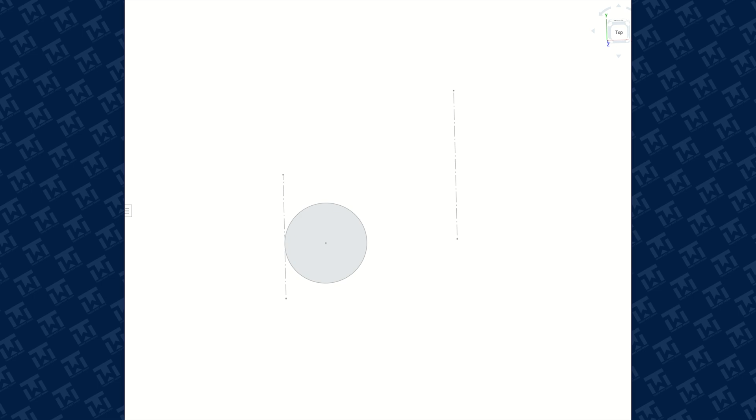That'll get you started. So this project starts with a circle. We revolve it into a donut. Then we add this base to it here, add some fillets, we add this top part. We core it out, add some fillets, and the basic model is done. Simple as that. Now off to the mold.

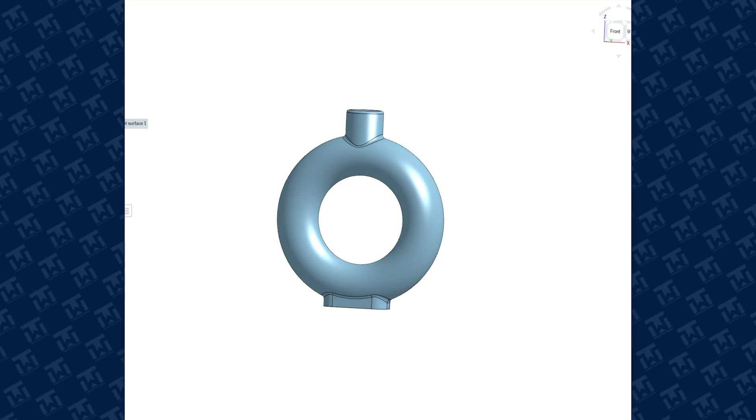So what we're going to do is show you the mold. So that's half of the mold, so make that off that surface. This mold is the same for both sides, so you just have to draw it once. But we have to make this top piece, and that looks like that. So holes line up this way, that makes that core, and we're ready to send this to the printer.

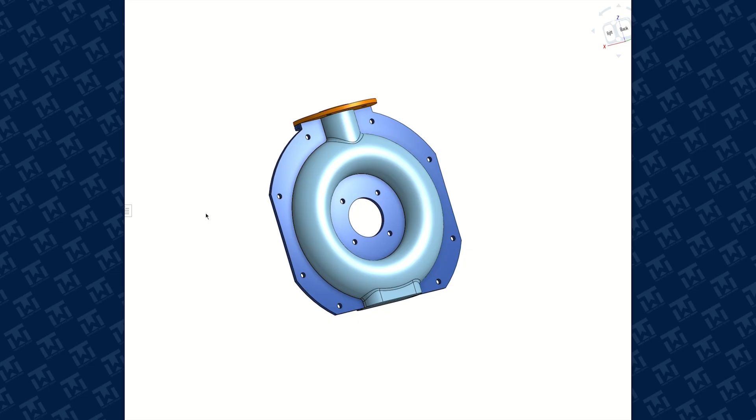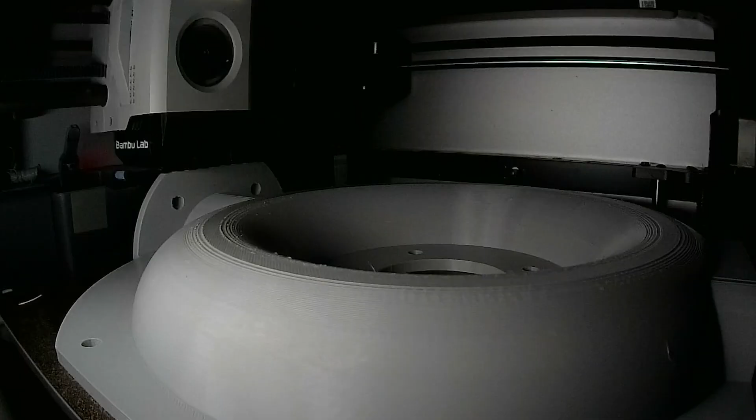It's always fun to watch the printer create my digital creation into something that's real in 3D. So we'll make a few parts, and we'll get this ready to assemble.

The mold's done, it's time for some mold release. So what we're gonna do is take some canola oil, spray it in the mold, take a foam brush, and just make sure everything is nicely covered, and then we'll bolt them together.

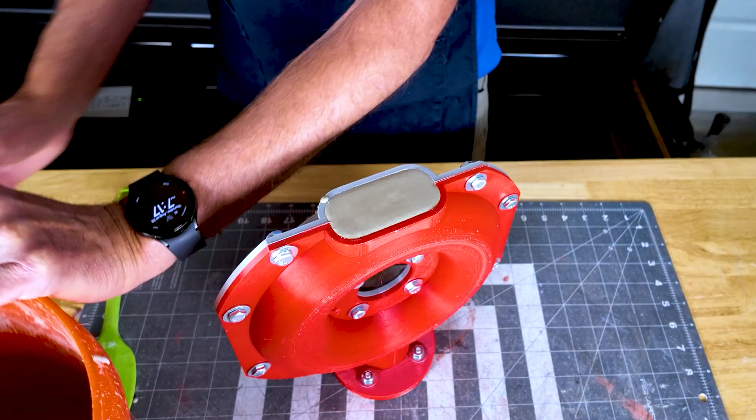All put together, and it's ready to pour some concrete. So let's get going. Concrete's done and ready to pour, so nice and smooth. Oh look, we've just got enough. Okay, we'll just do a little tapping, make sure we get it all dispersed. It's thin enough, we really don't get much air, there's not an issue, but I want to make sure it's all dispersed in the nooks and crannies. So I think we're good.

So we'll just let this sit for about 3 hours, and we'll pull the molds off.

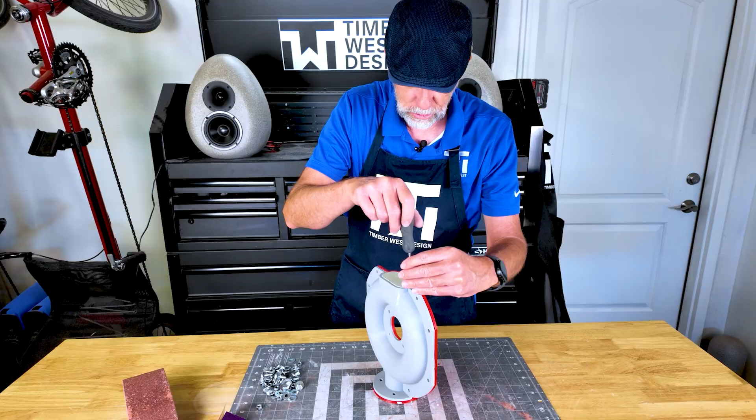It's time to pull all the hardware off, the last bolts right here. So what I like to do is just kind of take a screwdriver and pop it in between here, and just go around this thing just like so. And there's one part, you just tap the edge probably a little bit like this. That one's off, and then the core, just like so.

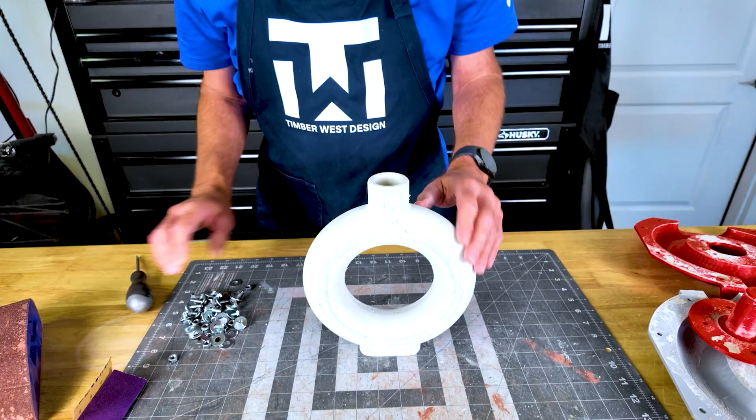Next step, let this dry out, then we'll sand it. So there's a little bit of some imperfections, I can take some 150 grit sandpaper and sand it. If imperfections are a little bit much, you can take a block and kind of round things off. Just depends on the condition of the flaws and how much sanding you need to do.

So we'll get this all sanded down. We'll feel around, make sure it feels good, and then I'll put it in the priming booth and we'll prime it. So I'll see you at that step.

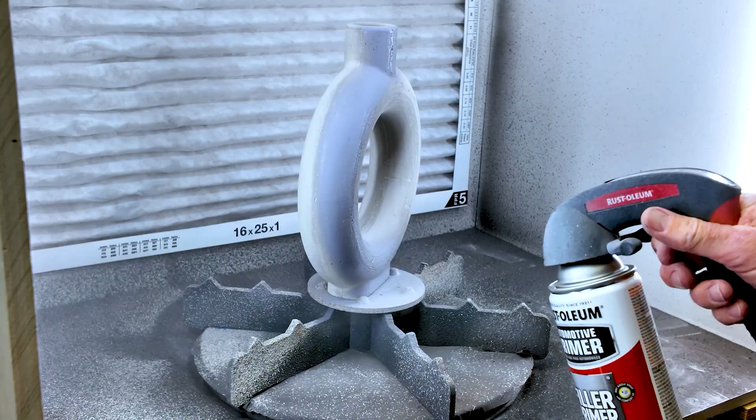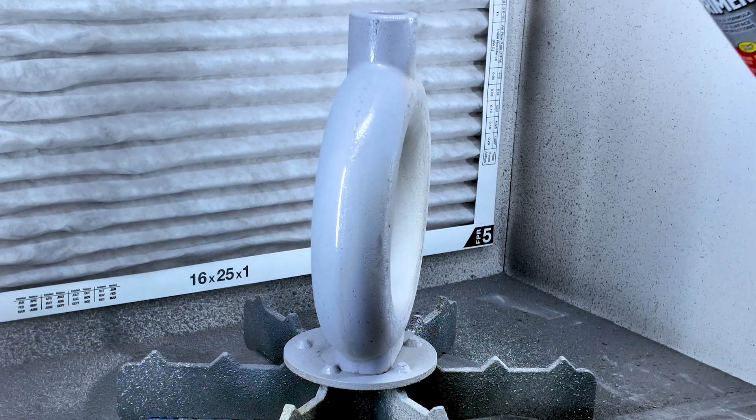It's time for the primer coat. So what we're going to do is just kind of go through, light layer at first, just get some coverage on everything. After this first layer, since it's so light, it'll flash off in just a few minutes. Then I'm going to come back and go probably 2 heavy coats after that, see how it looks, and then we'll get it ready for spot putty.

The primer's dry. We've got a few little flaws here that we need to address, so I take some Bondo spot putty, take a gloved finger. Sometimes I'll use a putty knife, sometimes a glove, just depends on the part, but we'll just kind of smear that into the area with the flaws. We'll go around this thing, I'm going to do a textured paint, so it doesn't need to be flawless, but I need it to be better than it is. So we'll just kind of go through this thing, touch up some of the little voids with the putty. I'll sand this whole thing with 150 grit sandpaper, and we should be ready to paint.

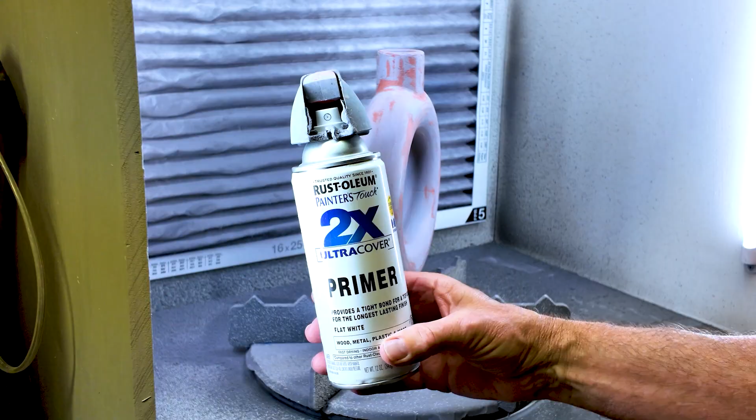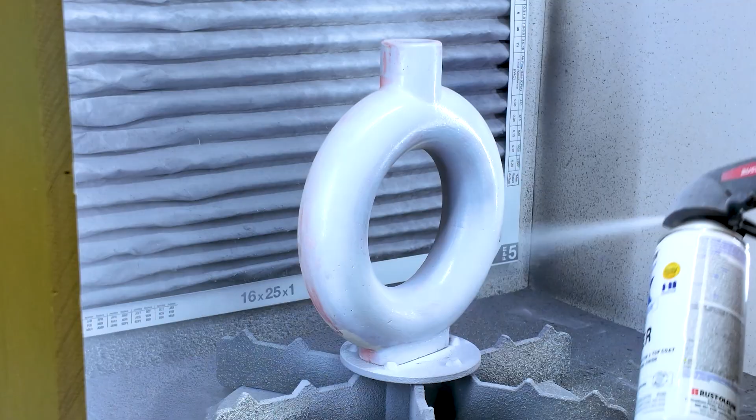So we're using this white primer for the base coat. We're going to just do a light layer to get our first coat on. You don't want any runs. So just going to cover it lightly, and I'll go over it again a second time just to make sure I have not missed anything. Doesn't need to be heavy, just needs to be white. So we just need a good covering. So we'll go all the way around, get that done, and then it'll be time for the top coat.

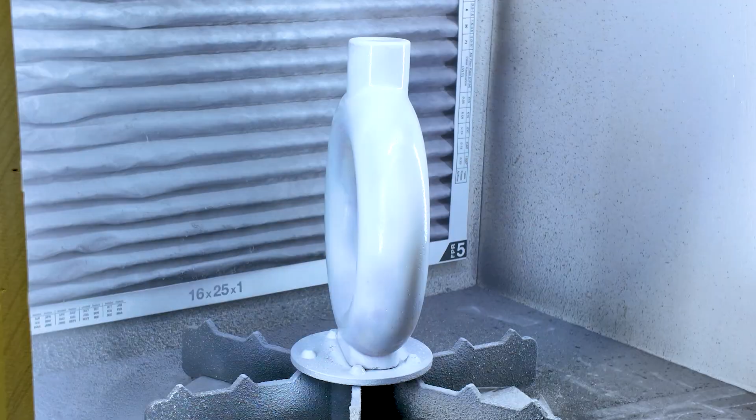It's time for the first layer of the top coat. So we're just going to lightly fog. We're not trying to fully cover on the first go. We're just going to do one light first coat, and then on our second coat we'll go for a more complete coverage. So just light fog, just like something like that, and then we'll let it sit for about 30 minutes, come back and do the second coat.

Now it's time for the second layer, and now we're going to really go for some good coverage. So just carefully go through. We don't want too much, but we just want to go a little heavier than the first time. Just kind of go around this whole thing, and we'll give it overnight to dry, and we'll take it from there.

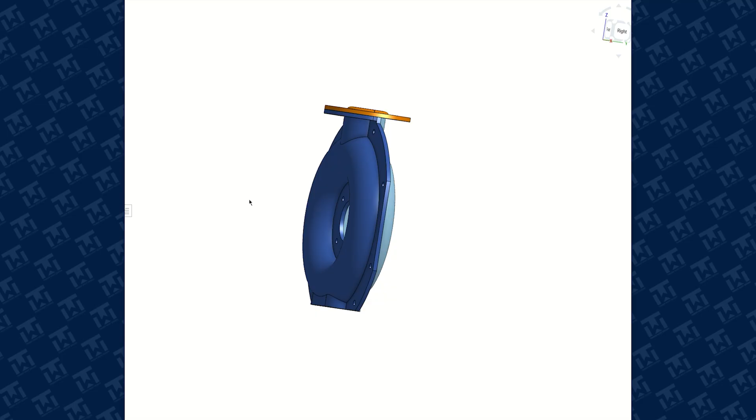The paint job is done. I really like it, it turned out great. The texture from this Rust-Oleum stone paint just looks fantastic. I really like this, I do a lot of my projects with this type, and maybe a different color or two, but I think it turned out great. Designing the mold with just 3 pieces made it much more beginner friendly. I think this is a great project if you're just getting started with concrete casting.